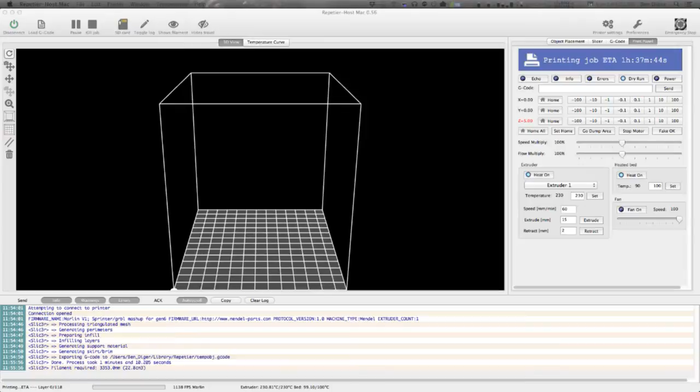Alright, let's fire this up. Start. I wonder if I can get this up a little bit higher. This is a really terrible camera, I apologize for anyone who's watching. It's the old original iSight.

But what we're going to be working on today is this right here. So I've been working on this for a while. I have the plastic frame all printed, so I'll turn off what's not printed. Basically all these little fan blades here. I've started printing a version of them, which is over here.

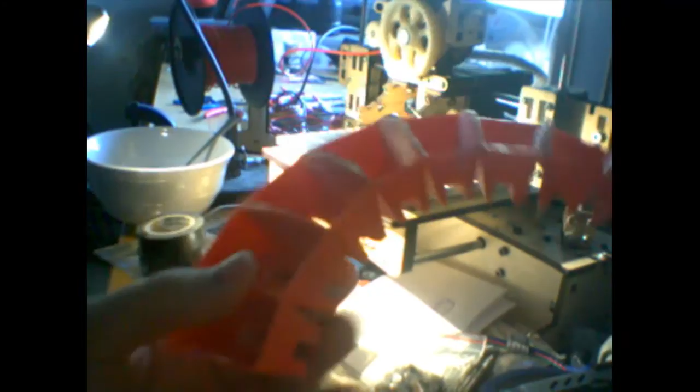Let's cut to the camera. Pop this off the mount. So, these are printed in red because it's just an available color I have. And the electronics that I got from AlexPlusLEDs.com will slide into these slots. And I'll print this once I have the design finalized in black, and put some reflective tape in here so it's a little bit brighter, and then I just have to tape color filters on the outside, and this goes inside the helmet on the sides, you see here in 3D.

So I'm using Maya 2013. You can use any 3D program to make 3D printed stuff. I learned this in school, so this is what I've been using. I'm technically done with the frame. There's a few tweaks I'll need to make based on the one that I printed. But for right now, I'm going to be working on the sidebars, which are these guys here.

Fire them up. Grab the camera. How well it's gonna work. So the camera doesn't like it. Yeah, we'll turn them off. Easy to see when they're off. So get a light on this. So these are the sidebars. They basically go on the sides of the helmet, near the chin pieces. I guess they're called chins, not sidebars. I'm getting the two different helmets mixed up.

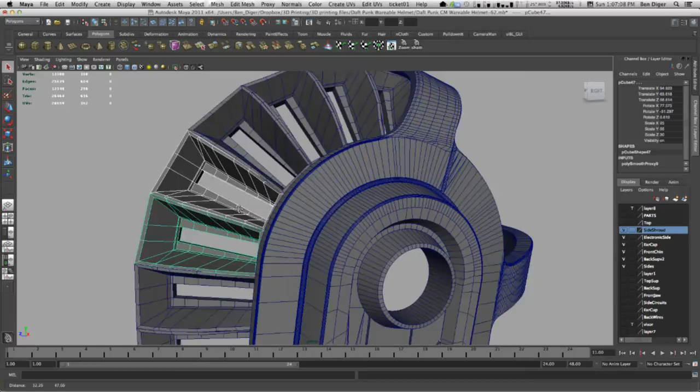And I put in these little blocks in between these parts here, so that when you glue the fronts here, the edges is basically where you glue it. So I line all the plastic up so that the edges are where you glue stuff together, and you don't have to print all this plastic in here. And I wanted the inside to be angled so it matches the other ones correctly. So I added these blocks in the back so that when you glue the front, you can push the backs together and glue those together, and then you get the curve just right.

So depending on what version of the helmet you have, whether you have the Volpin one or the Firewire one, or whatever one you buy, if you have a 3D printer, you can actually download these parts once I'm finished with them and print it yourself. I actually do have, I'll pull the window up for it.

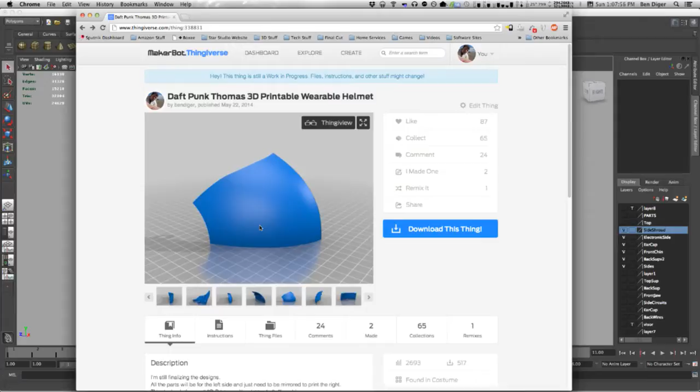I actually do have on Thingiverse the Thomas helmet, which I've uploaded. So they all print in pieces that you can fit on a normal size printer, and then you either glue or zip tie or screw, whatever you want to do to assemble it. Once it's assembled, I went through and I put on glue and smoothed it out, and then I'm going to paint it, sand it, paint it, sand it, and so on until it's nice and smooth.

Eventually get it chromed. I won't be chroming it for Halloween, but I will chrome it eventually, it's just too expensive. So I'm going to be working on the mounting brackets for the sidebars here, and I gotta measure them.

Some people may notice that this helmet looks a little bit different. I guess the bottom chin part of this helmet is a little bit longer. This bottom part should actually be up here on the helmet. I don't want to say bad design, but I made it a little bit longer so that it fits my large head.

The version I upload, I'll just basically connect all these pieces together and then just select the bottom half and shrink it up and repair it so that it looks correct. And I wanted to be able to fit all the electronics in here properly, since there's a lot of room. The version I will upload will be fixed. The one I'm working on is just for my own personal reasons. And if anyone's interested in getting that one, I'll upload both if I need to.

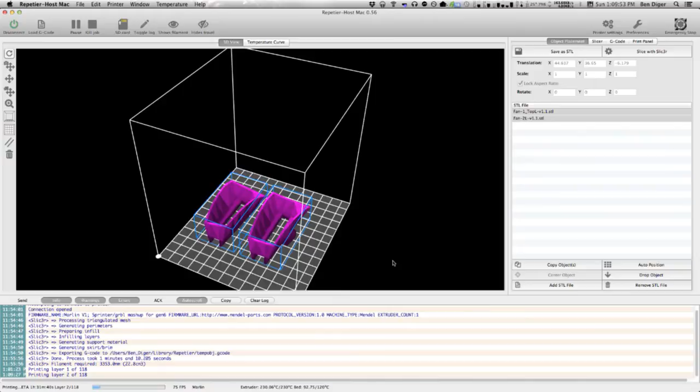But I will upload the fans separately, so anyone who has an actual Daft Punk helmet and doesn't want to make these things out of cardboard or some other material, if they have a 3D printer, they can print them. They print flat. So, I don't want to move those around. Thankfully, it doesn't mess with anything. So, they do print flat. I designed them to print easily on a printer. You don't need support material for these.

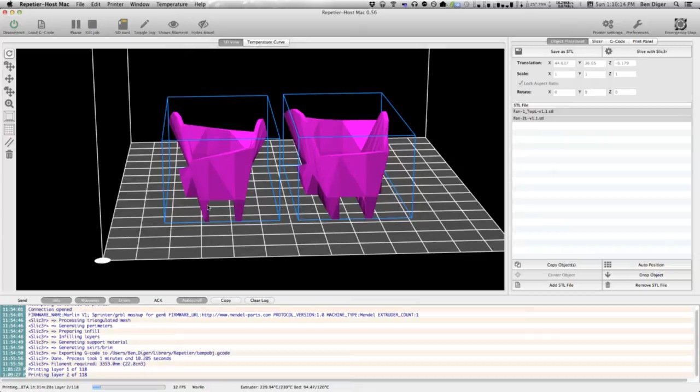Depending on your printer, you might want support material just for this gap here, but a good printer should be able to get that centimeter gap. It's not very large. And you won't be able to see it because it'll be behind a tinted plastic. So, wow, I keep moving those around. So I'm printing these. These are probably going to take an hour and 30 minutes, so probably 2 hours because it's an ETA. Go back to Maya and let's get started.

So there we go. And we're gonna put a band in here about 10 millimeters up. So I'm actually gonna remove my rotations on these so that I can work on it. This is just fantastically fast with all that's going on my computer right now. So 10 millimeters up, we'll center this on the grid so I can work on it. So like this.

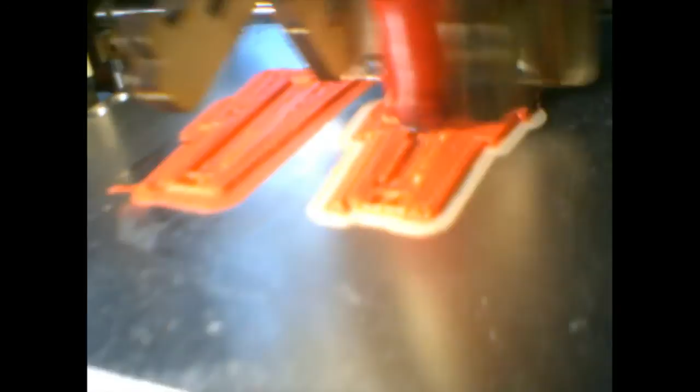Cut to the camera so I can show you. So it's with the one on the, and you can see how it's really white.

Well, apparently the hot end melts and disintegrates and evaporates, or whatever it does, the pigment out of the ABS plastic, if it's sat in the hot end too long. I have the hot end turned off as soon as it's done printing, so I think it's just that period that kind of destroys it.

So it's just off. So if I was ever printing anything for this that I wanted to keep or give to somebody or sell to somebody or whatever, I'm not using this plastic. It's not red, it's like orange, peach. Yeah, it's gross. We'll cut back.

You can actually see the Guy-Man helmet over there. I also printed a frame for the shell, or for the visor that you can use a heat gun with. Just put that back. You can use a heat gun to mold your own plastic visor.

So basically I need to make a mount. And my helmet has screw mounts, which you can see here. So I gotta actually avoid that part of the design, but still make it usable in other helmets, which I don't have for reference, so I can't make it perfect.

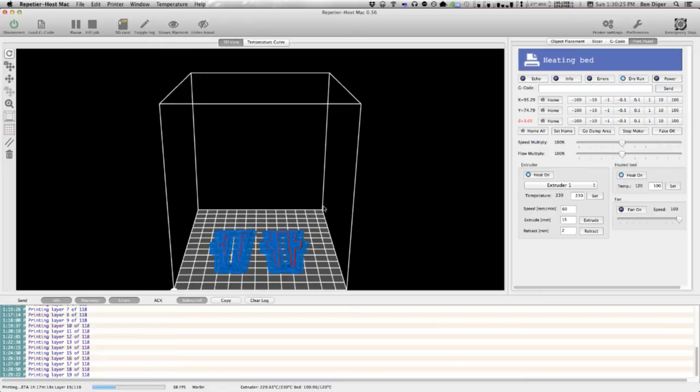This one right here took... well, let's check. I started the slice at 11:54 and it finished at 11:55, so it took about 2 minutes, or maybe until 11:56. Right now it says it took a minute, but the estimates are never correct.

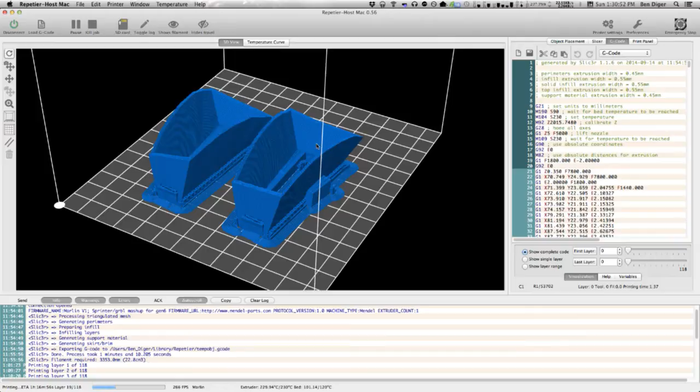So I didn't really follow what I just told you about smoothing, but these parts aren't going to be seen, so I don't have to worry about it. You'll see there are polygons on the edges here. Let's see it better in this one.

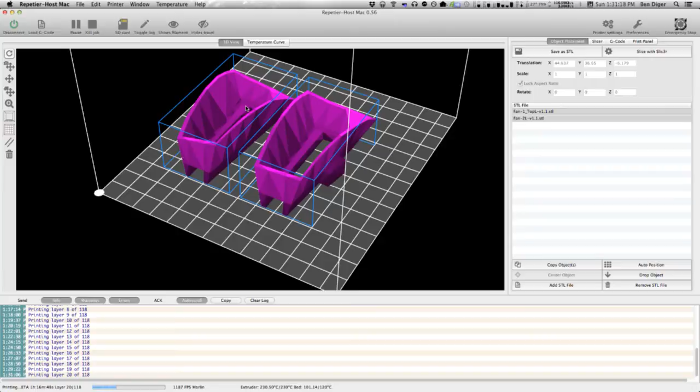When I export things from Maya using the plugin that makes STLs, it doesn't smooth the object, but after I upload this to Thingiverse and someone downloads it, it looks fine. So it must be something with my STLs before they get converted that shows how the normals are messed up.

You can see here I didn't smooth out or make very many polygons, it's very low poly. But if any of these vertices are pulled out a little bit, you'll see that triangle in your final print. So if you want something to look smooth, you need to smooth it.

We'll hide our visor and go back to working on this guy. Put it back.

Now we're going to adjust our cylinder here. Since we already have all the settings for it, I'm going to increase that just to get the shape I want, and change the thickness. Since I made it so small and then scaled it up, all these numbers are a little off, so I'm actually going to do 0.1.

2, 3. So that's pretty close. I'll keep that.

Because the outside edge here will line up, I'm actually going to shrink this down so the outside edge will attach to the inside. This is going to be a flat plate with some parts jutting up to hold it, because it doesn't need to be really structurally sound, since the whole frame of the helmet is the structure.

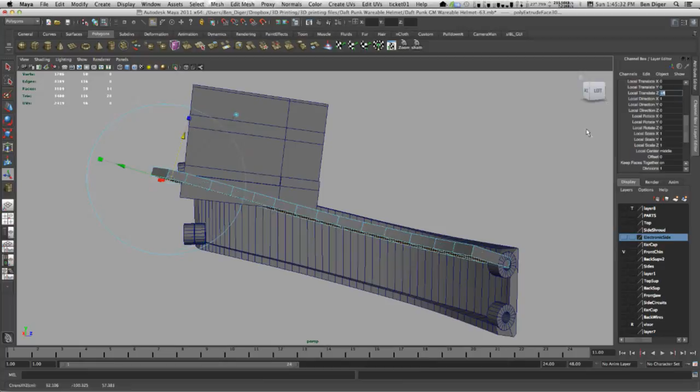It's kind of old. So now that I have that basic shape done, I can extrude it and make it a thick piece—basically just extrude and move it down a little bit. And it's my extrude, so -4 mils, make it pretty thick, substantial. Bam, we have a bracket.

And you can see all that time I took to put in that space for the cap, completely wasted, because it won't actually put the bracket through there. So what I'm going to do is leave it kind of the way it is, so that there's a flat part that gets printed into the object this rests on, so you get that orientation right.

And then I'll also extrude some polygons up to create support brackets. I'm not going to go all the way to the top because it'd be a very thin, flimsy piece to print on—my printer could probably do it, but not everyone's printer can. So I need to make it hold stuff at an angle, with a little angle bracket that holds stuff, and just flat shims on the back.

I do tend to open up—at least on the other one it worked well. Make sure this part over here is open, so I'm just going to leave that window open now, so this can just slide into place and stop. So it's easy to assemble, and it's not this weird 'oh you gotta fish the wires through here and solder them back on'—it's just easy to put together, so people aren't horribly annoyed by my design.

Just checking something. So I've got about 12 minutes left before I'm going to stop. I just wanted to film a quick hour of me designing, so I'm actually going to try to get this done in that hour. I did have a lot of talking—I am kind of windbagging, but I thought I can't just sit here in silence. I got to actually be talking, so there's something to listen to and give some advice.

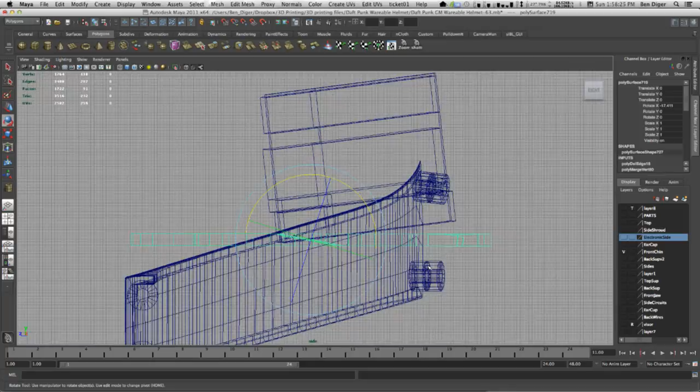Let's see. Modify center pivot. I'm going to flatten this out so it's a little easier to work on it. It's pretty flat. Yeah, close enough. Alright. Now I can work on the top and bottom vertexes without any issues.

Vertex, vertex, vertex. These ones are going to get deleted. But I can't do that, can I? No, I can't. Why can't I? Ah. That's fine. There we go. Now I'll do the same thing here.